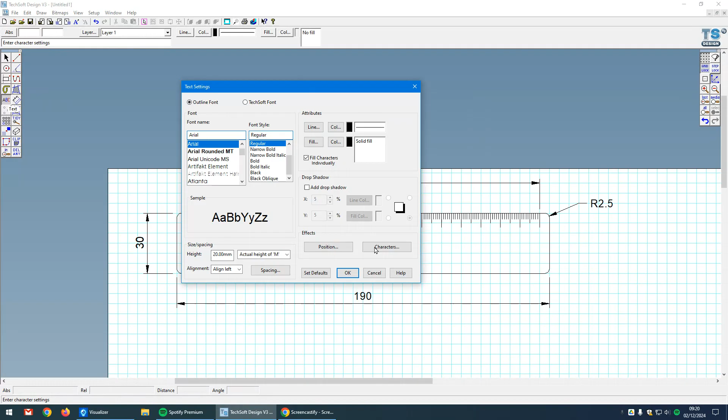Let's carry on with the development of this CAD file. Now I want to put my numbers in here from 0 to 18 centimeters. To do this, I'm going to be using the text tool, tool ABC in my toolbar at the top left. If I click on this, nothing seems to happen much, but if I right click, I get the text settings dialog box. Let's cancel this first and show you why that might be useful.

With the text tool, I'll click and type hello world, click OK, and you see that writing is pretty big, so not quite right for my ruler. Let's undo that. Now let's right click on that text, and we have the usual font choices and font styles. What I'm going to look at here is actually the height, which we could have as an actual height in millimeters, not a font size.

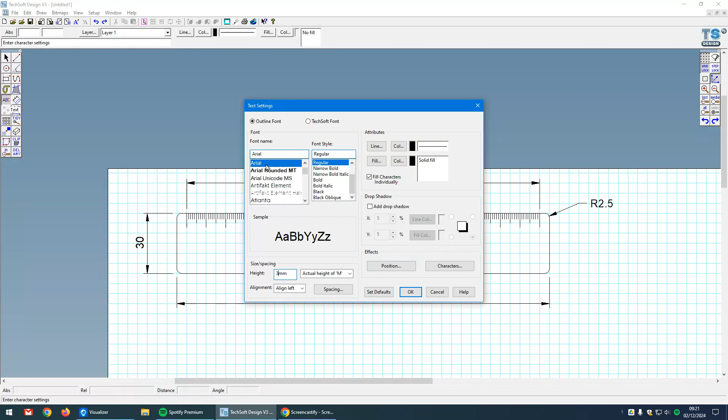Looking at the size of my ruler, I'm going to go with text that's 3 millimeters in height. Let's see how that looks. I'm going to stick with my standard Arial font, I think. Now let's come roughly into position, and let's do hello world again, shall we? We don't have to, but if I can spell it right it would be helpful. Let's see how that looks. Yeah, I think for numbers on my ruler, that's going to be rather nice.

So let's just click here. Let's put a 0. There you go. Let's put a 1. Let's put a 2 and a 3 for the time being.

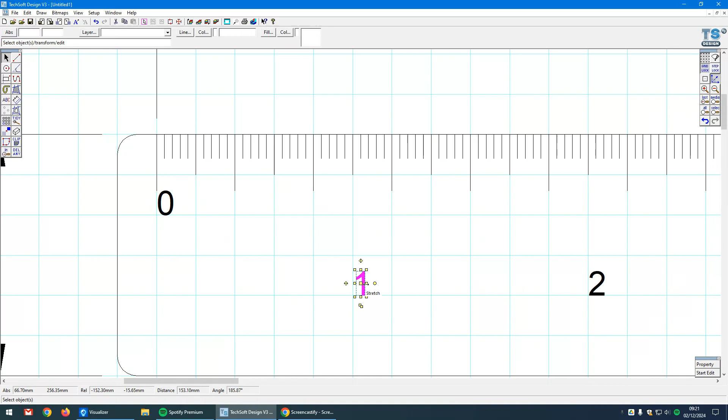Now obviously these all want to be positioned next to the relevant marker on the ruler. Where you position these, you have an element of choice. At this point in time, I am positioning them just to the right of each of these centimeter markings, and that seems to be working rather well, but you can obviously choose different locations.

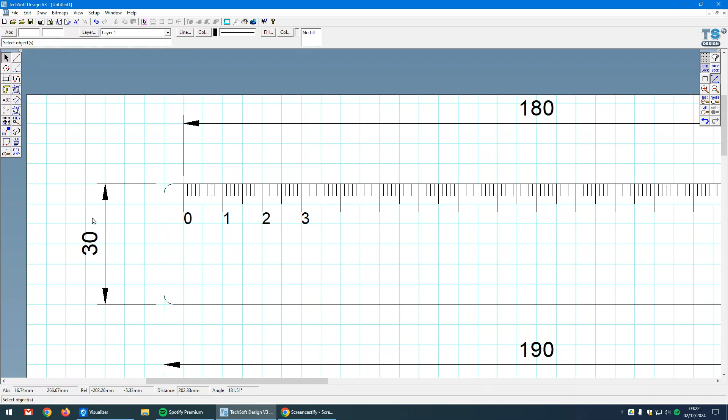I'm just going to jump ahead here and see how 10 looks. Now I'm not quite sure where 10 is, but actually that looks rather nice indeed.

So the key point here is that when I am drawing these, I've got grid lock turned on so that my cursor is on the grid. And then when I put the number in there, the bottom left of that number should technically - let's just try a 6 there. Okay, yes, so I can see here that it's not quite snapping to the left-hand side of the grid, and this one isn't quite sitting on the line there, and that one is sitting on the line there. But they are all quite closely positioned.

Interestingly, I think the reason why that one goes slightly below the line is because we think text fonts are all the same height, but actually there are subtle variations in the height of fonts which make them look better to our eyes. Having a look here, you can see the 0 goes lower than the 1 - that's intentional in the generation of that particular font style. Anyway, that's one way you can do it.

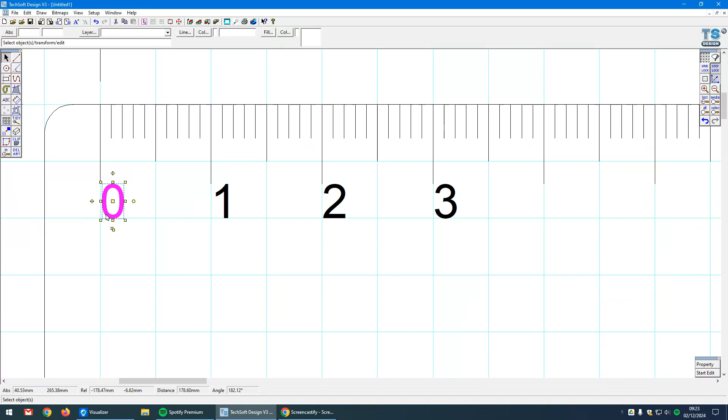Now, if you can see, they're slightly offset at the moment. If you want to position them actually underneath the 0, 1, 2, 3 centimeter markings, you could come to step lock, click on this number, and drag it to the right, and so on and so forth, dragging these along here. In fact, once I've got all my numbers down there, I could just select them all and move them, let's say 1 millimeter to the left.

That positions at least the single units. It doesn't quite do the right job here with the units and the tens, so do I move that 2 lines there? That kind of works there as well.

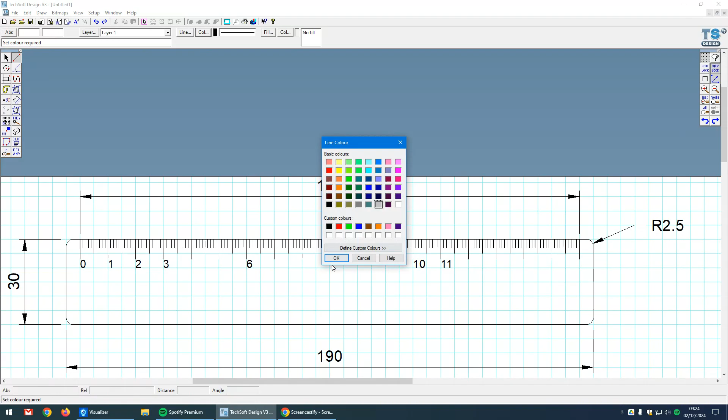Now there is one final thing we can do to make sure these numbers are absolutely precisely aligned to the centimeter markings, and that is I could provide a guideline. So I'm going to come to the lines tool here. I'm going to choose pale gray as my color because I want to do a construction line. What I'm going to do is just draw a line like that. Okay, so I've been quite precise here - I've got step lock turned on.

I've basically got drawn 2 millimeters up here. The idea of that line is I can now select that 0. I can turn off step lock, turn on the attach tool, and if I right click on this, you'll notice the attach tool dialog box says it will snap to the endpoint of a shape. Well, the endpoint of this line is that top point.

So if I click on this 0, you'll notice now that there's a little square just surrounding my 4 directional arrow cursor there. I'm just going to click away for a second. You'll hear the little beep there, hopefully. And if I now pull this in and make sure that square is overlapping the end, covering the end point of that line, it now snaps in perfectly onto that point.

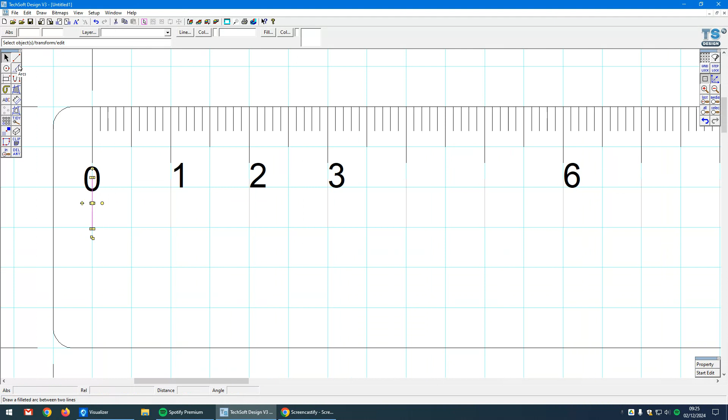So what I can now do is select this line, come back to my transformation tool. I've already got it set up to do 18 columns, 10 millimeter spacing. Click on OK. And now I can select each of these numbers and just snap those in, and they will perfectly line up with each other and with the marker on the top centimeter and millimeter grid there.

And it works as well, of course, for double units with units and tens. Would you call it a double unit? Anyway, units and tens numbers. Okay, so that is how I can make sure everything lines up.

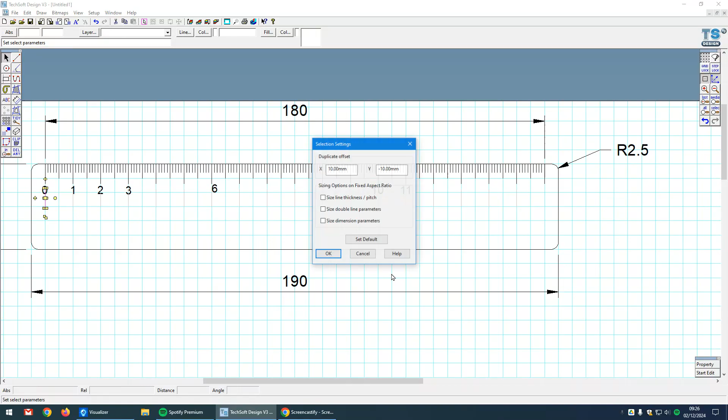I'm just going to cancel that for the time being. I mean, I could always come in here, turn on step lock, and draw that last line there myself. Okay, so let's see what else I need to do here.

Oh yes, at this point, if you've done this system of gray lines, leave them. Don't remove them. The reason is because when I come to grade your design folder, if I see in your CAD file you've used alignment marks like that, that is bonus marks. That's going to get you the top marks on our assessment rubric. So make sure you leave those lines in there.

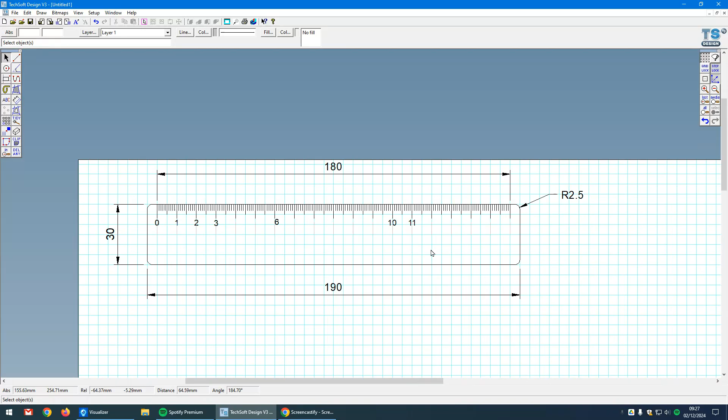Okay, now let's just have a quick look at graphics here. I am going to bring in a Chrome session and do a search for cute cat. I'm just going to take this one here. Oh, it's on Pinterest. Let's see if I click on this. Yes, I need to now right click.

Hopefully you realize that if you right click on these little thumbnails, the resolution is not good. But if you right click on the actual image here and go copy image, the resolution will be better. You can see the resolution of this one is 236 by 418, which isn't great. And of course, I could always go to tools, images, and make sure I go for size large. But for this one, I'm just going to take that little cat there.

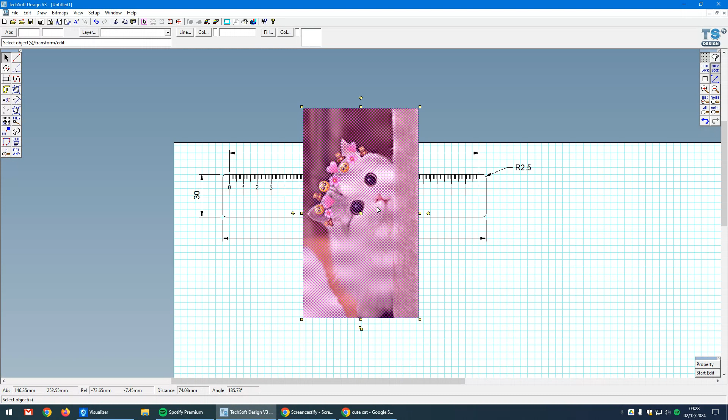Let's right click, copy that image, come back to Techsoft, and let's go ahead and paste that in. Now to paste it in, I'm going to use Control V. There it is. And notice that because I've got step lock turned on here, I can actually snap that onto the grid in the bottom left-hand corner.

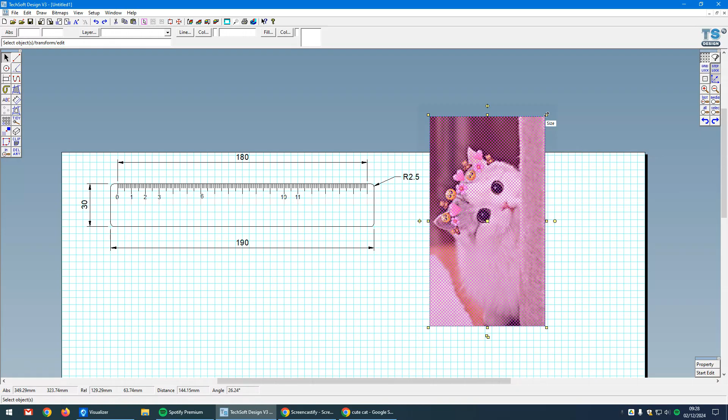Now, in terms of resizing this, I've got to be careful. If I left click and drag, I can distort that image, which obviously is not what I want to do to my cat. So uniquely to Techsoft Design, if I right click instead and then resize, it maintains the proportions of the image, which is what I want to do. I don't think this is the best image to work with because it's a portrait, not a landscape image, but for this demonstration, I'll work with it.

Okay, now let's come to bitmaps. This image will not laser engrave in its current format, or it won't laser engrave successfully. So I'm going to come to the bitmap menu.

I'm going to go to vectorize bitmap, and I'm going to click on this image. What I want to do is convert it from a bitmap image into a vector image.

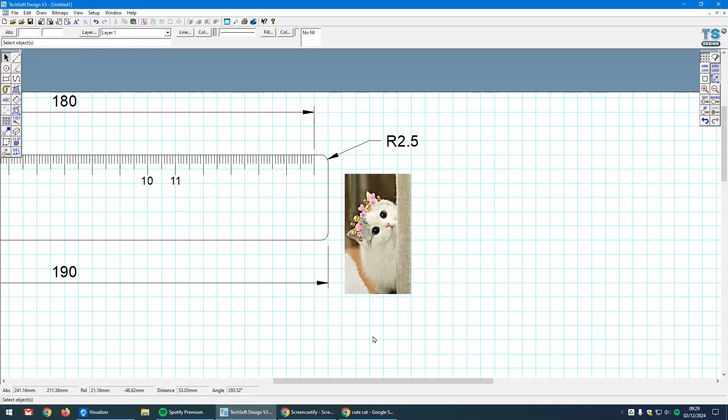Just to be clear what we mean by a bitmap image, I'm going to load paint.net and paste that image in, then zoom in using control wheel mouse, and I can see how this image is made up from millions of little dots. That is a bitmap or raster image.

We need to convert this into a vector image, which is made up just of lines. If I zoom in on this line here, no matter how far I zoom in, I don't see any pixelation of that line.

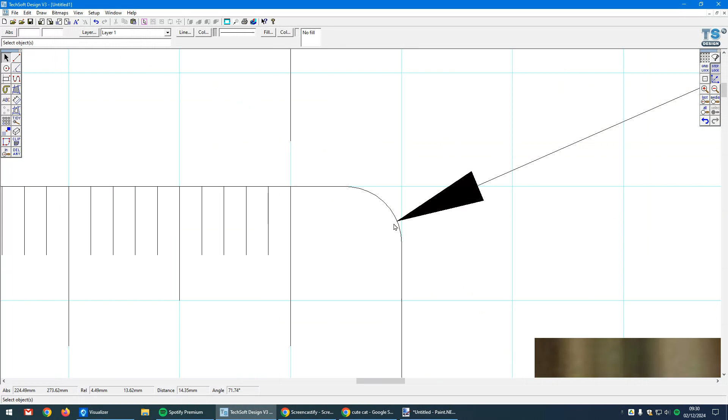Let's now go to bitmaps, vectorize bitmap. I'm going to click on this cat. It's having a good think to itself. Right, okay, so here we are. We're going to get some odd things happening here.

The key point is that I have to work with a monochrome image for our Trotec laser cutter, so I'm going to go to monochrome. With its luminance value, I can control what range of color, brightness, or contrast gets actually converted or laser cut. As you can see, whatever I do, it's not really working very well, so I'd suggest you don't work with images like this because the consequences are going to be pretty disappointing.

So let's come back to my cute cats here. Let's go for something better - I'll go size large for high resolution, and I'm going to go color. Can I go black and white? Okay, now stencils like this are going to be great.

Let's take this one here. I'm going to copy that image. Notice as well, this has got some text in, so this is going to be quite fun as well. It's a nice high resolution. I'm going to copy that image, and because we've got that text there, I'm going to put this into paint.net.

Now, I'm aware that I should be citing that source, but as it's just going to be a ruler for a friend, I'm just going to take the original image and not worry about citing the source, which would be naughty if I was doing an essay, for example. Anyway, let's now paste this to a new image.

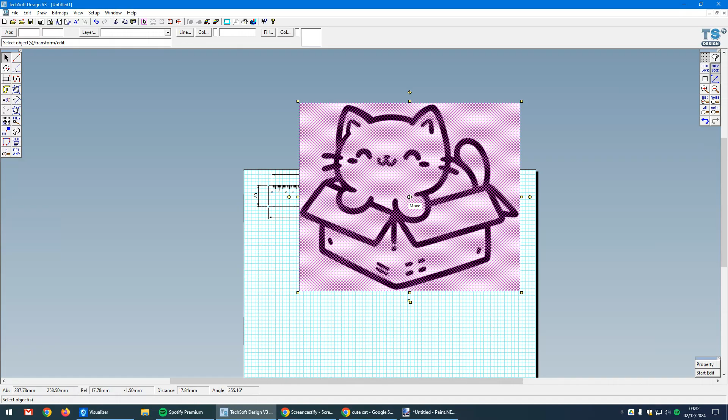Now I'm going to copy that selected image back to Techsoft here, and now I'm going to paste it in. Okay, there it is. Wonderful. Let's bring this down here. Let's scale this - right click, scale that up, and then scale that down, should I say.

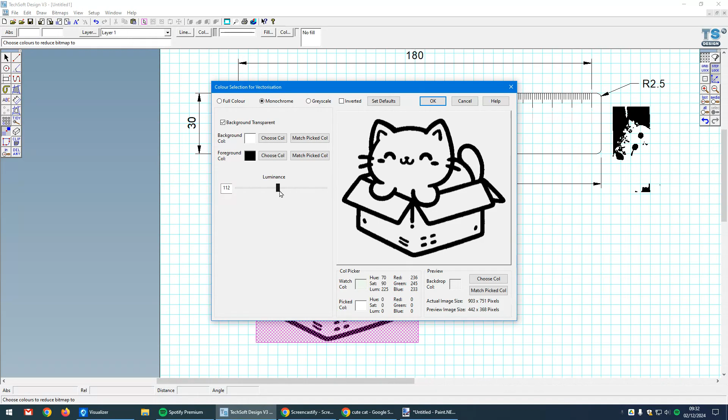Now let's go to bitmaps, vectorize image, click on this, monochrome, and now you can see that's going to work really well. I've got to just control the luminance value there to make sure I'm happy with the thickness of the lines. Click OK, and notice here as well that I have a custom settings point - that's because the resolution of this image was high, so now I can increase the resolution of that conversion, which will give me a better quality vector graphic.

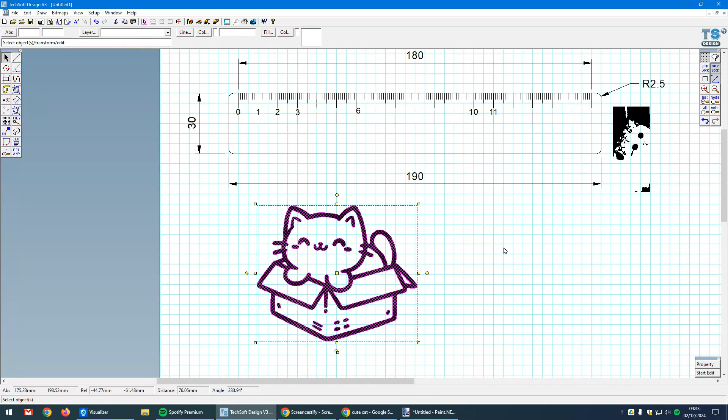Okay, and there's my cat ready to put into my ruler. Now, vectors do not contain individual pixels, and if I zoom in on this, you can see that it's made from basically a very complicated polygon shape.

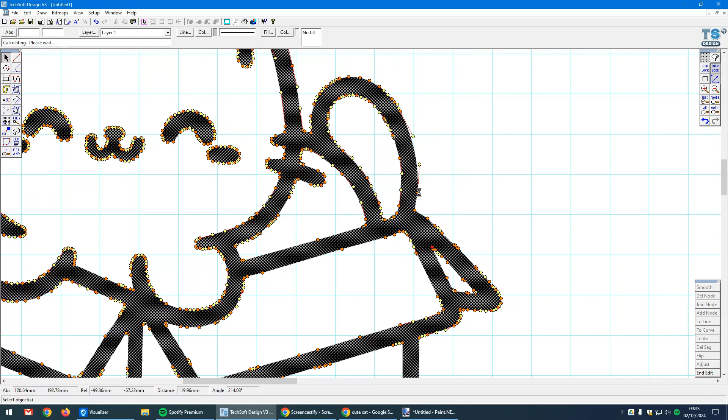If I click on it, you'll notice I also get a little start edit button appearing down here. If I click on that, you can see how this has been made up from many, many polylines, and I can actually click on those polylines and move them away to distort the way this looks. I've now got a cat with a flag on its tail.

I'm going to undo that - I don't want to do that. Let's end edit and go back to just my normal view. So I can right click, scale that down, pop that onto my ruler, and that's going to look great.

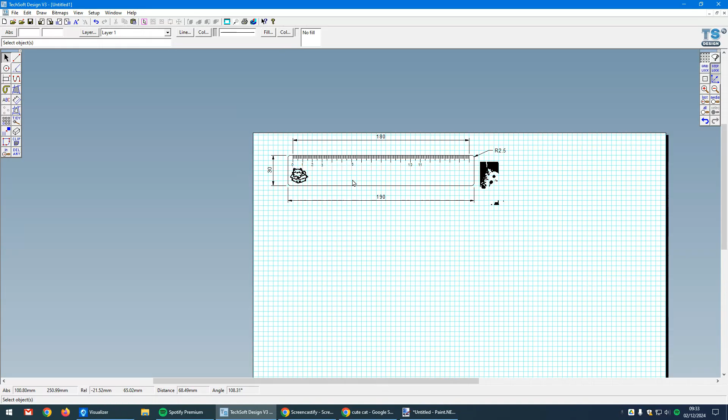Okay, so I'm going to stop with this video, and we are going to have one more where I'm going to look at adding in your text and then making sure that it's formatted for laser cutting.